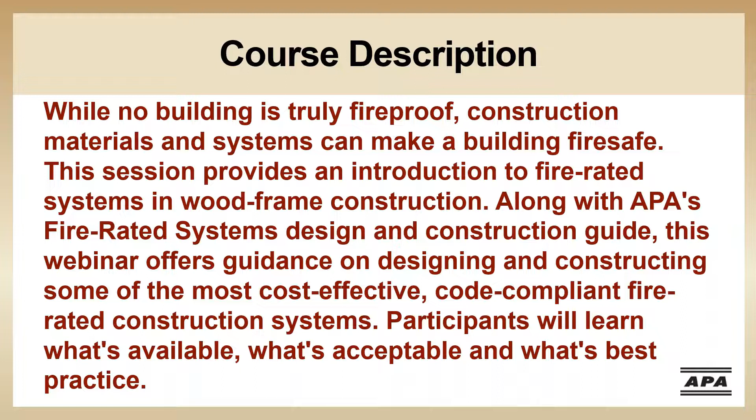All right, let's get started. On the screen you'll see a copy of the description you were provided upon registration. During this course, we'll talk about different assemblies found in APA's Fire-Rated System Design and Construction Guide. This webinar will be a guide on designing and constructing cost-effective and code-compliant fire-rated systems.

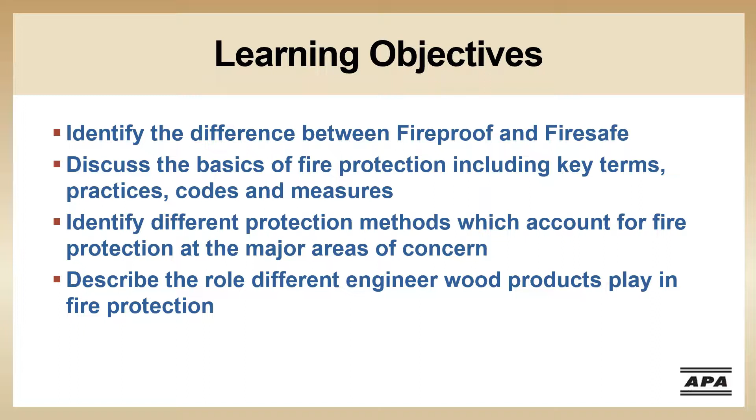This is a list of the learning objectives we're going to cover during this course. We'll identify the difference between fireproof and firesafe. We'll look at key terms related to basic fire protection, identify applicable codes, and recognize the tests by which these systems are measured by testing agencies. We'll review different building systems that create the required fire protection and describe engineered wood products used today to meet fire requirements in various buildings.

Today's program is for the construction professional who's interested in finding the balance between cost, code, form, and function. Our agenda will follow the learning objectives listed in the previous slide.

First, fireproof versus firesafe, along with the codes and terms associated with fire protection. We'll discuss different areas of buildings and how we protect them with these assemblies. We'll talk about considerations when using different engineered wood products.

No matter where we live, forests play an important role in our lives. Healthy forests reduce greenhouse gases in the atmosphere by absorbing carbon dioxide from the air, thus combating climate change. Plus, wood's natural properties combined with highly efficient wood frame construction systems make it a top choice for builders and those looking at energy conservation.

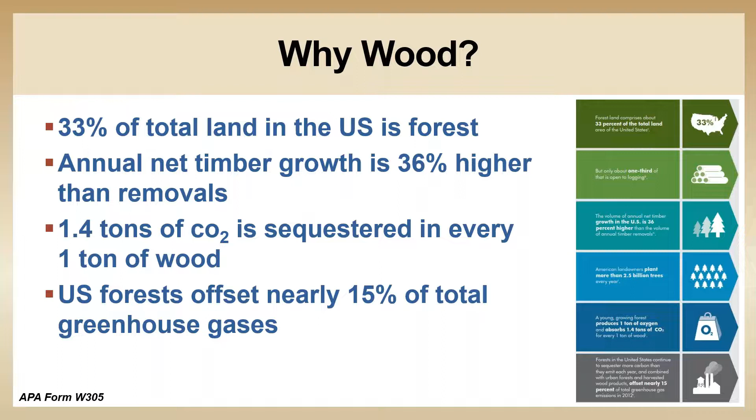Now, here are a few terms that may be new to you. The first one is the critical point at which human life is untenable. The Forest Products Laboratory has done numerous studies on dwelling room fires involving combustible contents. It was concluded that wall and ceiling materials, whether combustible or non-combustible, have little to no effect on the time or temperature to reach this critical point.

Flame spread is the spread of fire within a room and is measured by the performance of the materials used for the interior finish on walls, ceilings, and partitions. This is a property of the surface material once a fire has started.

Fire resistance is the measure of the containment of the fire within a room or building. It is defined as protection against fire penetration through a wall, floor, or roof, either directly or through a high rate of heat transfer.

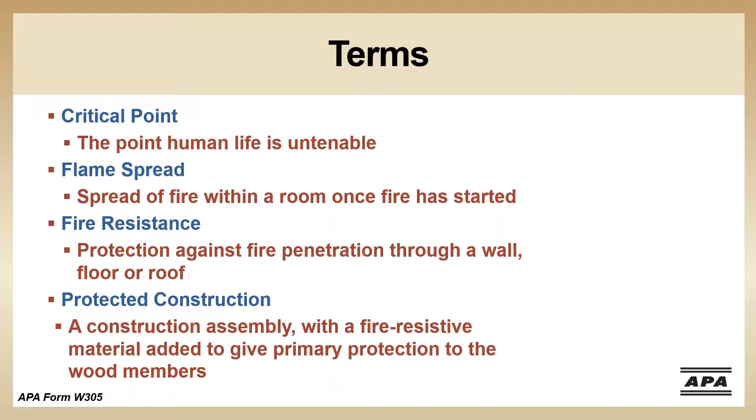Protected construction is any wood assembly, such as a floor, ceiling, or wall, with a fire-resistant material added to provide primary protection for the wood members. This material may be gypsum wallboard, plaster, or acoustical tile. This covering prevents flame passage and temperature rise while reinforcing framing against collapse.

We'll begin with fireproof versus firesafe after having seen the key terms and understanding the important role engineered wood products can provide in many buildings.

The first step is recognizing that no buildings are designed nor built that are fireproof. This just does not exist. The photo here is from a 1953 fire at the General Motors plant in Livonia, Michigan. The open building design was greater than 34 acres in size and 866 feet wide. This plant was considered completely non-combustible, yet was a total loss due to the collapse of the unprotected metal construction.

This fire led to the development of the 204 standard by the National Fire Protection Association. This is still considered one of the worst automotive plant fires in history.

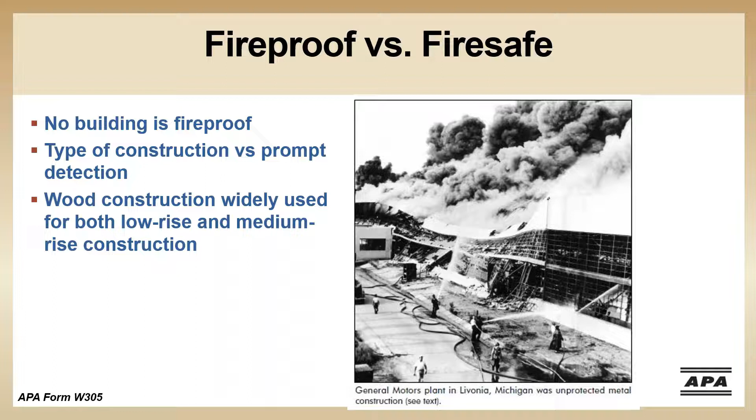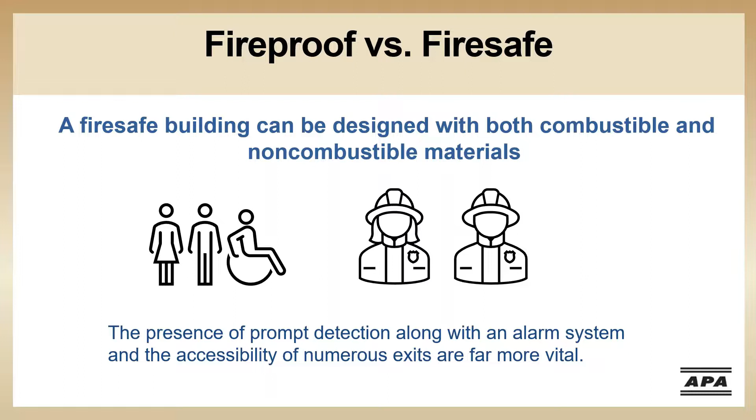Although the type of construction is important, first we have to protect the occupants and firefighters. The presence of prompt detection along with an alarm system and the accessibility of numerous exits are far more vital. With proper construction in conformance with code regulations and recognition of the protection factors, a fire-safe building can be designed with both combustible and non-combustible materials. Wood and wood structural panel systems have been widely used for both low-rise and medium-rise construction.

Next, we'll look at the different codes and testing when talking about fire protection.

In order to evaluate fire safety of a structure, building authorities may consider many factors, including flame spread and fire resistance rating. The best known flame spread test is the tunnel test, ASTM E84 or UL 723. In Canada, they have a similar test with ULC S102.

This test takes a sample of material 20 inches by 24 feet, installed as a ceiling of a test chamber and exposed to a gas flame at one end. The rate at which the flame spreads across the sample is compared on a scale. The scale starts at 0 for inorganic reinforced cement board and goes up to 100 for red oak. Additionally, this test will measure the opacity of smoke generated by the burning material.

Table 1 in the Fire Rated System Guide summarizes the International Building Code's interior finish classifications. Materials are broken into 3 classes, limited by the area of use and based on the severity of the fire hazard.

Class A materials are permitted for areas where fire hazards are most severe, such as exits in unsprinklered buildings. Class B are permitted in areas of intermittent severity, such as corridors providing egress, and Class C would be other areas. APA trademark panels such as plywood and OSB fall generally in Class B or C. If the panels are fire retardant treated, they can be used in Class A unless prohibited by the code.

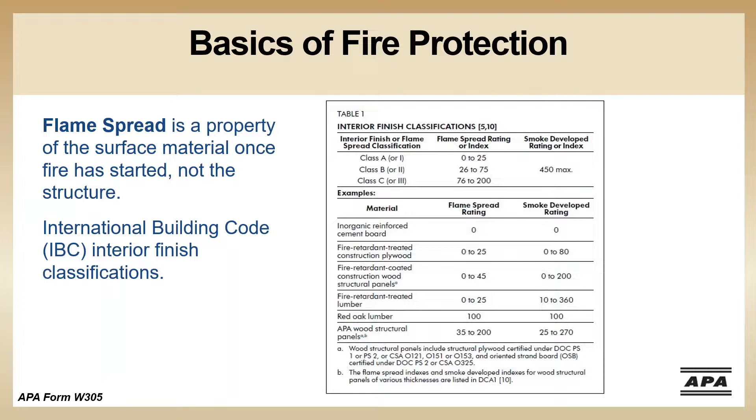APA's technical topic: Flame Spread Index. The performance rated wood structural panel publication displays test results based on ASTM E84 or UL 723, showing flame spread indexes for the wood structural panel.

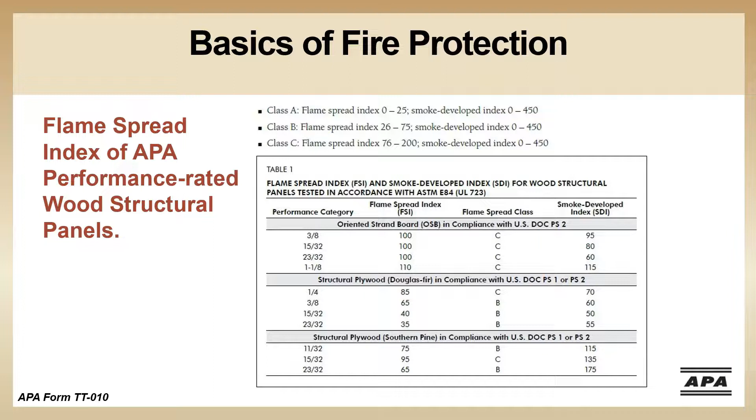These include plywood, structural plywood conforming to Product Standard 1, or for wood structural panels and OSB conforming to Product Standard 2. These tests again were performed in accordance with ASTM E84.

Table 2 shows flame spread requirements for interior finish as called for under the IBC for both sprinklered and unsprinklered buildings.

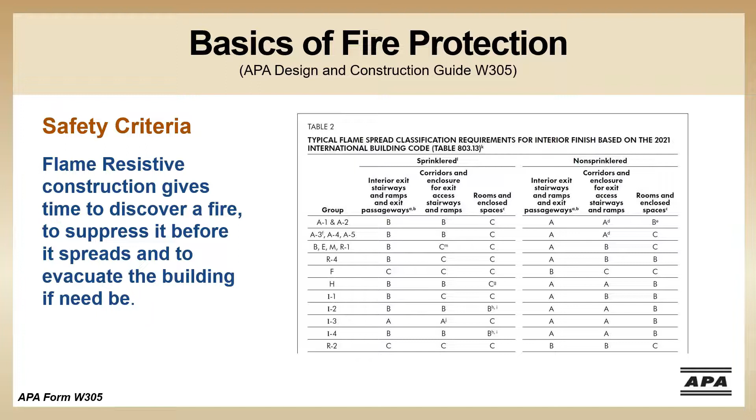In many cases, ordinary wood frame construction with wood structural panel sheathing provides ample fire safety and is completely acceptable. When unusual circumstances require additional protection, the designer's options include protected construction, mass timber construction, or heavy timber construction. Under each building type, Type A requires a higher fire rating that allows for larger structures.

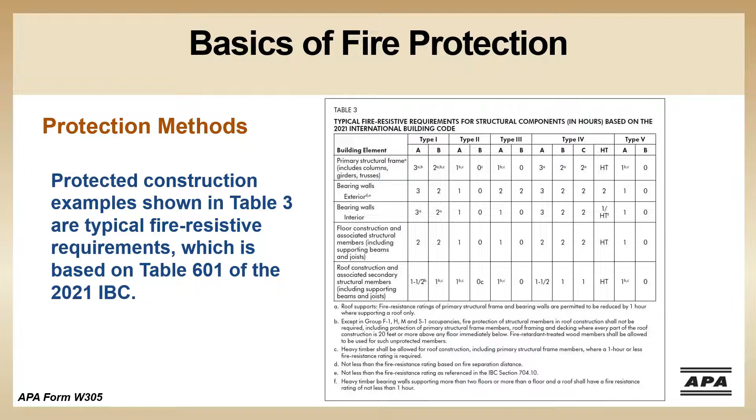How do we know how to build these rated assemblies? It can be done by calculation using Section 722 of the International Building Code, or by tested assemblies. When testing an assembly, it's simply constructed and tested in accordance with ASTM E119, and the rating is determined by the duration of the test.

The test is performed using a standard time temperature curve shown on the left here. This allows for a standardized test over a variety of products and construction methods. I should point out that the time temperature curve shown does represent a very aggressive fire. Real-world fire curves will vary depending on the fuel load and other factors, but this curve serves the purpose of standardizing the test.

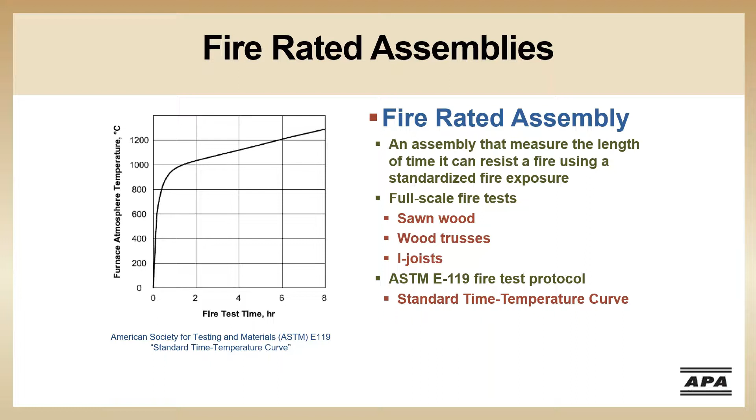The table shown here shows allowable stories from the 2021 IBC Table 504.4. We've selected to show only the residential aspect, which applies to all building types. Today, we'll be focusing on the fire protection methods used most in Type 3 and Type 5 structures.

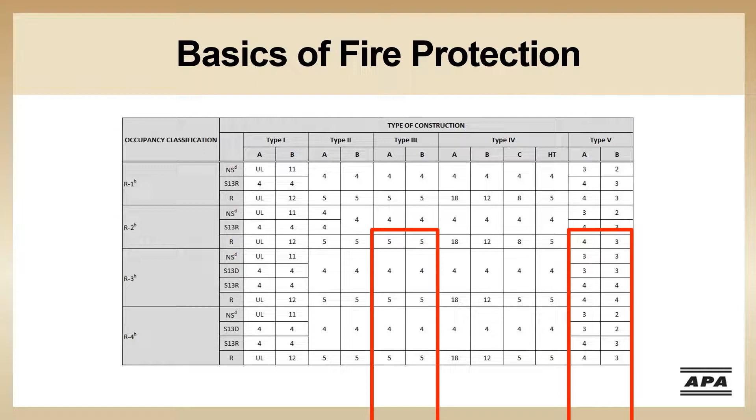Some of the more popular protection methods are listed on this slide, and we'll talk about mass timber construction, heavy timber construction, fire retardant treated wood, fire retardant paints, sprinklers, and then we'll go into some detail on the fire rated assemblies themselves.

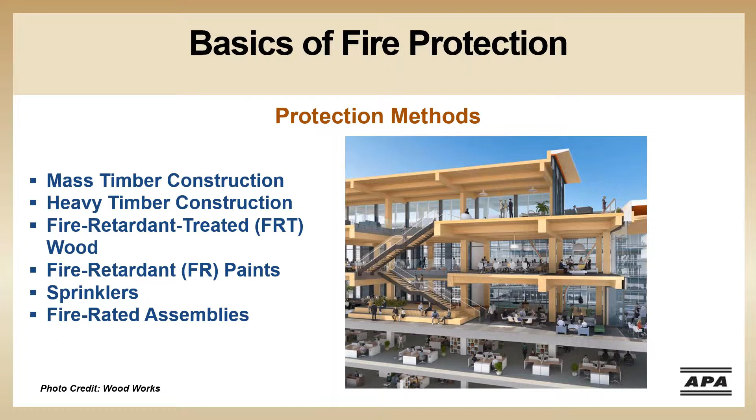Mass timber construction provides fire protection by using mass timber, which is defined in IBC by structural elements in Type 4 construction, primarily of solid, panelized, or engineered wood products that meet minimum cross-section dimensions of Type 4 construction.

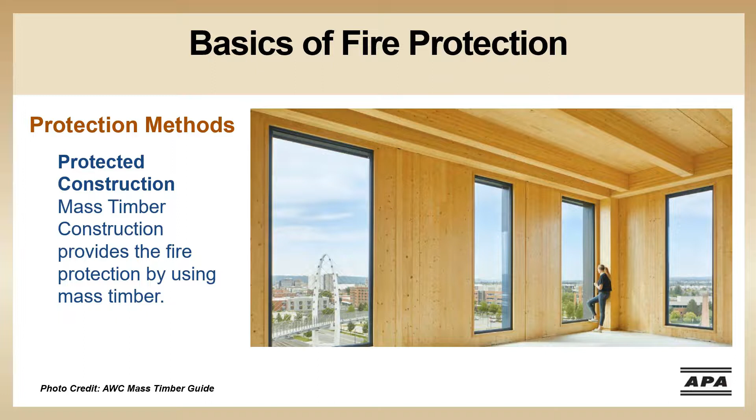Cross-laminated timber, or CLT, in compliance with ANSI APA PRG 320, is required for Types 4, 4A, 4B, and 4C construction, provided that the fire resistance rating of the mass timber meets the fire resistance rating requirements of the IBC, based on either the fire resistance rating of the non-combustible protection, the mass timber, or a combination of both. Section 602.4 through Section 602.4.3 of the 2021 IBC should be referenced for more details.

The IBC places limitations on the height and area of buildings according to its compliance with certain established criteria, which are based on codes concerned with the health and safety of occupants. Because light frame construction is usually the best choice from the standpoint of cost and simplicity, yet it is accorded the lowest basic allowable areas, it is to the designer's advantage to find ways to secure area increases to take advantage of the economic and versatility of wood construction.

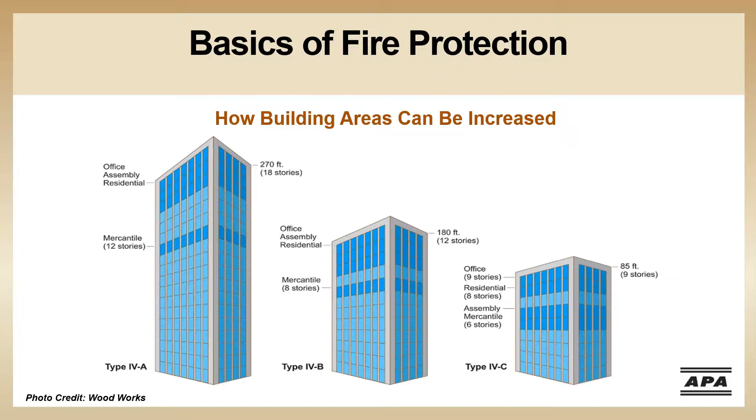Type 4 buildings have been approved for up to 18 stories using mass timber. More detail than we're going to go into about mass timber today can be accessed through WoodWorks.

The use of mass timber for taller buildings has been used in Europe and Canada for some time now, and the intersection of lower embodied energy and renewable resources propels the mass timber industry forward. As noted, timber buildings store carbon in the structure for the entire life of the building. Mass timber, for example, has a negative carbon footprint equaling 2,300 cars being taken off the road per year.

This is per the contractor on this Ascent building. The contractor also spoke about the benefits, saying mass timber materials are not inexpensive. However, mass timber offers several cost competitive advantages and long-term benefits.

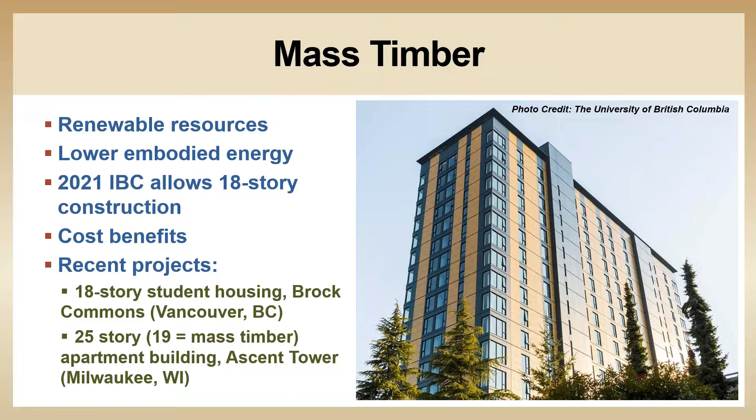Columns, beams, and panels on average weigh one-fifth the weight of concrete and steel, thus reducing shipping costs and requiring a smaller workforce to install. With prefabricated panels delivered directly to the job site, construction time can be reduced by approximately 25%, saving owners even more time and money. Furthermore, wood structures have a biophilic effect on people, increasing occupants' overall health and wellness, and give long-term value to the design.

Heavy timber construction implies protection provided by the mass wood members. The name comes from early New England textile mills, where it is known as mill construction, planking timber, or slow burning. This construction method means that while the outside may char during a fire, the surface char acts as insulation, while the strength of the wood is such that it continues to support the load, so the chance of building collapse is greatly diminished.

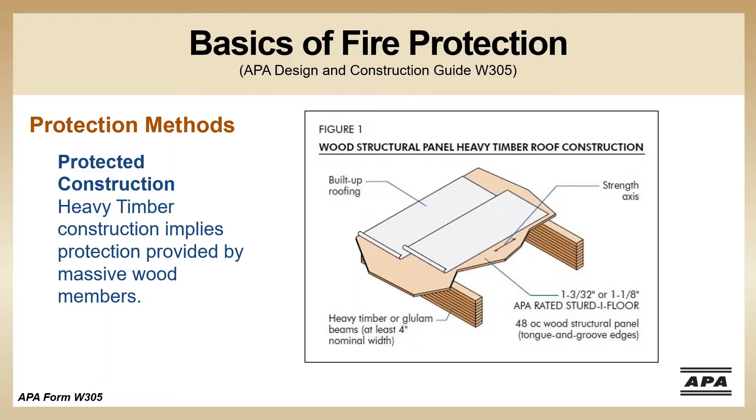The minimum dimension required by the code for heavy timber is found in Table 2304.11 of the 2021 IBC, shown in this publication in Table 4. Per the 2021 IBC Section 803.3, there's a heavy timber exemption which states that exposed portions of building elements complying with the requirements for buildings of heavy timber construction in Section 602.4 or Section 2304.11 shall not be subject to interior finish requirements, except in interior exit stairways, interior exit ramps, or exit passageways.

Here's a portion of the aforementioned Table 4 showing minimum sizes for mass timber products such as solid sawn lumber, glue laminated timber, cross laminated timber, or structural composite lumber.

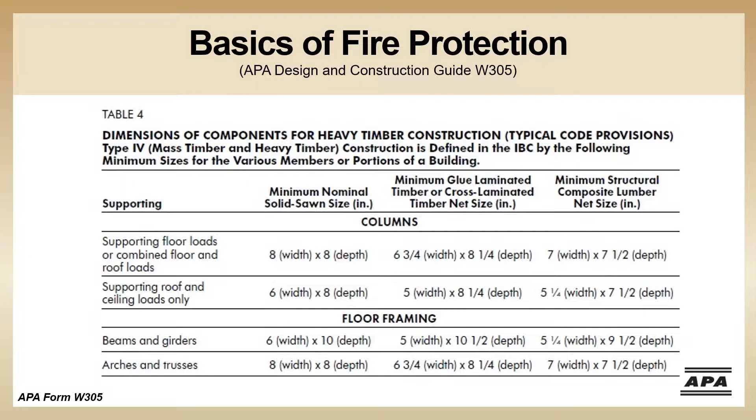Now, glue lam beams need a special mention due to their versatility and popularity. We've moved glue lam up in this presentation from where it is in the fire rated systems because glue lam has a reputation for being used in striking applications such as vaulted ceilings and other designs with soaring open spaces. The glue lam has a classic natural wood appearance that holds a timeless appeal, which makes it a part of any biophilic design.

Aesthetics aside, there are many applications where the strength and durability of glue lam beams make them an ideal structural choice. A glue lam with a minimum width of 5 1/8 inch can be adapted for a 1-hour fire rating in accordance with procedures by the IBC Table 5. This details the minimum depth required for the beam to meet a 1-hour rating based on the width.

Glue lams with minimum widths of 6 3/4 and 8 3/4 can be adapted for 100% of the design load. Tension laminations of the glue lam beams are always positioned as the outermost laminations of the beam, subjected to the maximum tension stresses in a fire.

The outermost fibers of the wood are the first to be damaged. For this reason, when a rating is required for a glue lam beam, the specifier should note that additional tension laminations should be used in place of core laminations, and it should be marked on the glue lam beam as rated for 1 hour or rated for 2 hour. You can reference APA's Calculating Fire Resistance of Glue Lam Beams and Columns for more information.

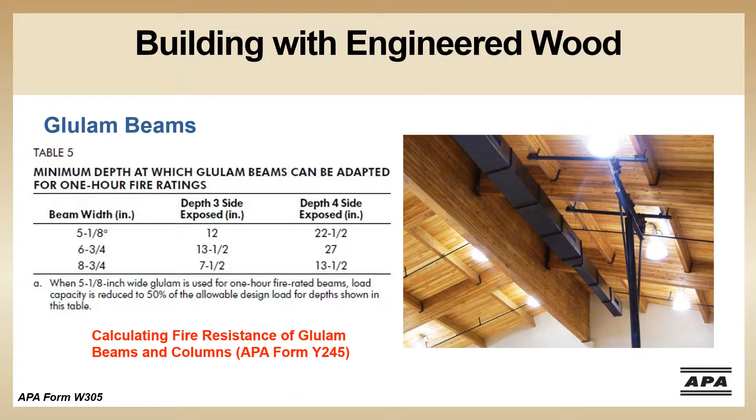The structural member's fire resistance is measured by the time it can support its design load during a fire. An exposed beam or column sized for a minimum 1-hour fire resistance will support its full design load for at least 1 hour during standard fire test conditions which simulate an actual fire.

Like mass and heavy timbers, the charring of a glue lam surface during a fire places a premium on the cross-sectional area. Charring weakens the glue lam's cross-sectional area slowly because of the self-insulating character of the char.

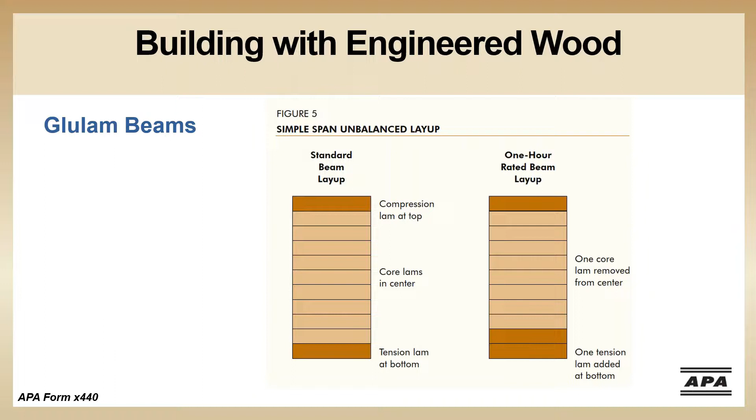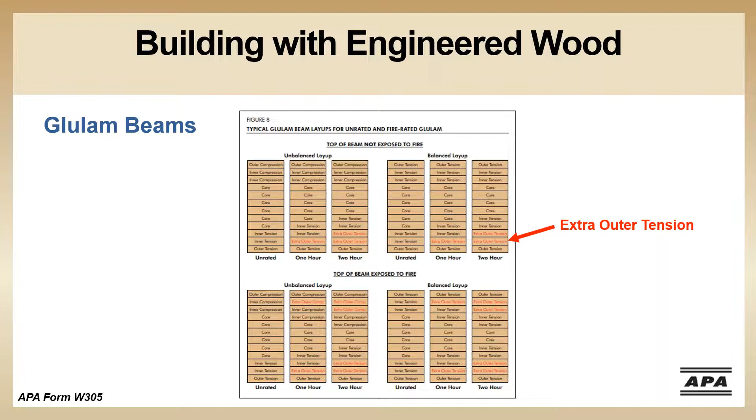Here you'll see different laminations based on the fire rating that is required. Note the laminations in red. The fire rating, fire exposure, and balancing of the beam will determine the location and number of additional laminations. The upper laminations shown have the top of the beam not exposed to fire, and the layups shown below have the upper and lower sides exposed to fire, where additional outer members will be added to both the top and bottom of the beam.

FRT wood is pressure impregnated with chemicals or a water solution, or by other means during manufacture, to inhibit combustion. This qualifies it for lower flame spread or smoke generation ratings, and reduces its fire hazard classification when identified as such by a code-recognized testing agency label. It is recognized on parity with non-combustible construction by many insurance rating bureaus, but not by the building codes.

The span ratings and load capabilities for APA trademark plywood are based on untreated panels and may not apply following fire retardant treatment. You should obtain structural performance characteristics and use recommendations for the FRT plywood from the company providing the treatment and redrying service.

I'd also like to point out that products treated with a non-pressure impregnated process do not qualify as fire retardant treated wood, as Section 2303.2 of the IBC also requires that an ASTM E84 or UL 723 test shall be continued for 20 additional minutes, and the fire shall not progress more than 10.5 feet.

Fire retardant paints can be used on plywood for non-structural interior finish applications to reduce flame spread ratings, depending on the paint selected. These paints are tested per ASTM E84 or UL 723 for 10 minutes, as compared to the 30 minutes for FRT plywood. The FRT plywood does require an additional 20 minutes of testing to comply with the American Wood Protection Association standard U1.

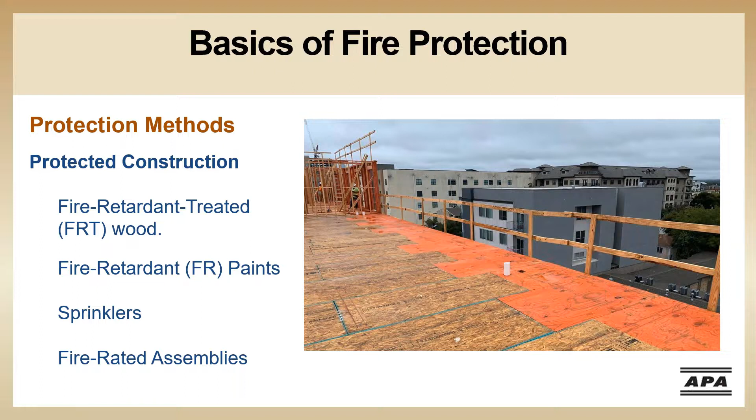All buildings must be code compliant to maximum permissible heights and floor areas. These specifications are based on certain characteristics of the buildings, including fire zone, the type of occupancy, construction and material systems, the setbacks from property lines, exits, and automatic extinguishing systems.

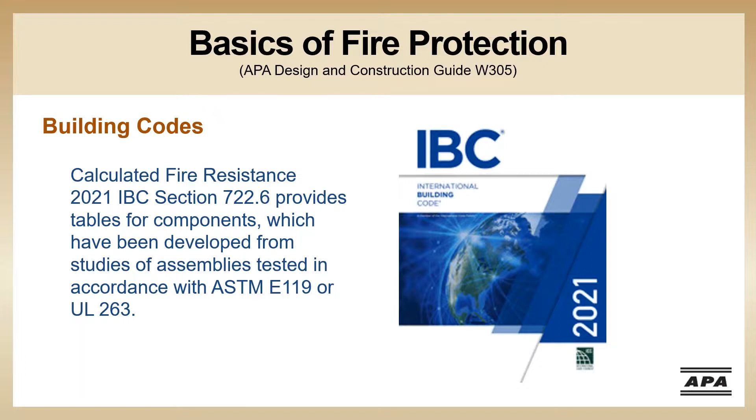The IBC permits determination of 1 hour fire rated wood frame floors, roofs, and load bearing and non-load bearing walls by calculation. As an alternate to assemblies, a 1 hour fire rated assembly can be determined by combining the individual component times of the assembly in accordance with the method and limitations in the code, thereby providing additional choices for the designer.

Now we'll look at some examples of how we can protect the different areas of a building. Many of these assemblies are going to look similar, but there are subtle differences that need to be followed, and how you select an assembly for your project will likely be based on cost and needs.

Figure 2A shows a 1 hour combustible wall assembly exposed to fire on both faces that has code approved APA rated siding or other approved exterior finish over a minimum 5/8 type X gypsum wallboard sheathing on the exterior side, with 5/8 type X gypsum wallboard on the interior face. Minimum 2x4 studs are required, can be spaced at 16 or 24 inches on center, and mineral wool or fiberglass batt insulation is used for the wall cavity space.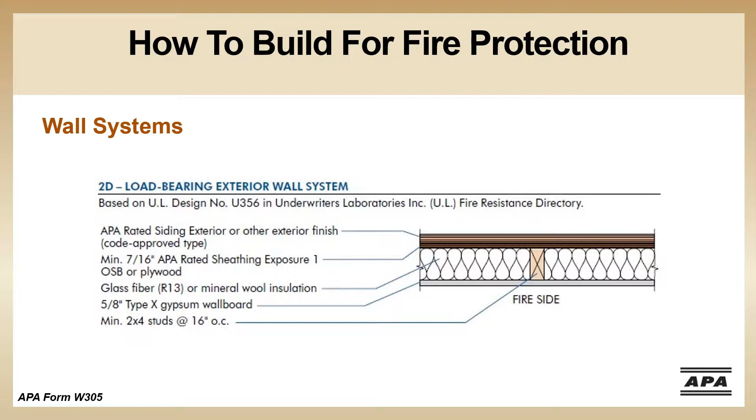Panels can be installed with the long dimension of the panel parallel or perpendicular to the studs. The vertical joints should be centered on the studs. Horizontal joints need to be backed with nominal 2x4 blocking. A change in these details may affect the fire resistance of the assembly.

A hidden advantage when using wood structural panels in these exterior wall assemblies is being able to use these products as a nail base sheathing. Continuous plywood or OSB sheathing is a secure, code-compliant nail base that provides an easy and effective solution for attaching all claddings. We're going to look at some of the advantages that plywood or OSB wood structural panels provide when they're used as a nail base.

Stud spacing of 24 inches on center can be maintained with cladding materials that require less than 24 inches on center. Shorter fasteners can also be used because they don't have to be embedded into the framing members. Properly installed wood structural panels provide lateral stability, allowing the structure to resist high winds. And lightweight siding materials can be attached directly to the wood structural panels, providing a structural nail base.

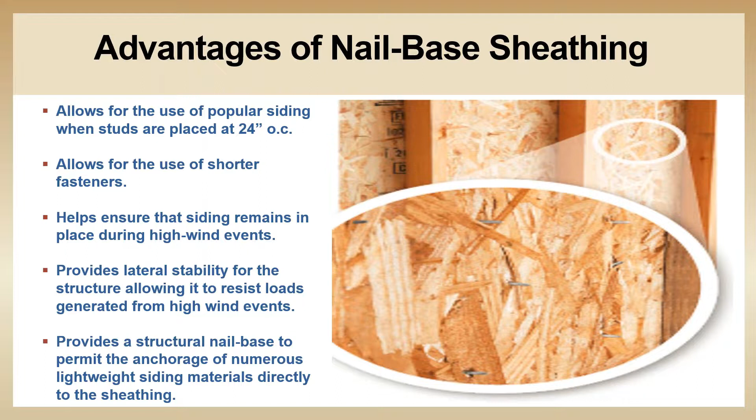Many floor ceiling or roof ceiling systems are listed in the UL Fire Resistance Directory and are accepted as rated constructions by the building codes. Examples shown in figures 4.1, 4.2, and 4.3 are using solid sawn lumber joists. When looking at the next few slides, you'll see similarities. We just want to point out that depending on your need, wood frame construction will allow for the most flexibility.

All the floor ceiling and roof ceiling assemblies detailed in the fire rated design guide require the face layer finish joints to be covered with tape and coated with a joint compound. Screw heads must also be covered with a joint compound. Other subfloor options for this example are listed in the design guide.

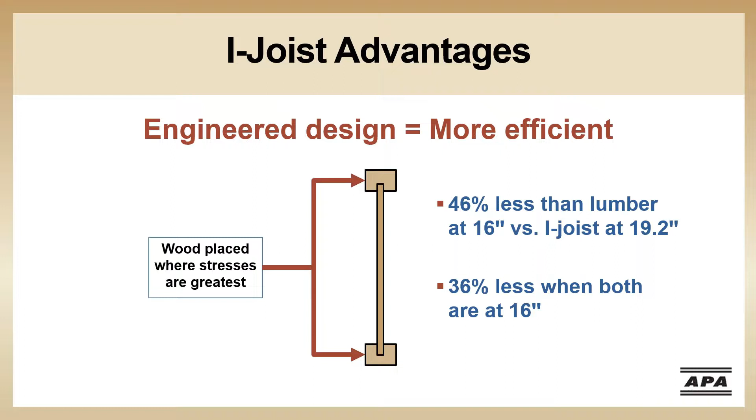These lighter weight joists also come in longer lengths, so that handling is easier, with the possibility of running a single I-joist from the front wall to the rear wall of a building.

I-joists are typically manufactured in 4 common depths: 9.5, 11 7/8, 14 inch, and 16 inch. Some manufacturers may also produce other depths. All APA I-joists meet PRI 400, the performance standard, at a minimum. Many I-joist manufacturers make products that exceed the minimum PRI 400 and have their own product reports issued through either APA or ICC.

As we move through these figures 5.1 through 5.9, varying flange width and flange areas will be mentioned for the different fire rated systems shown and should be accounted for during design and construction phases.

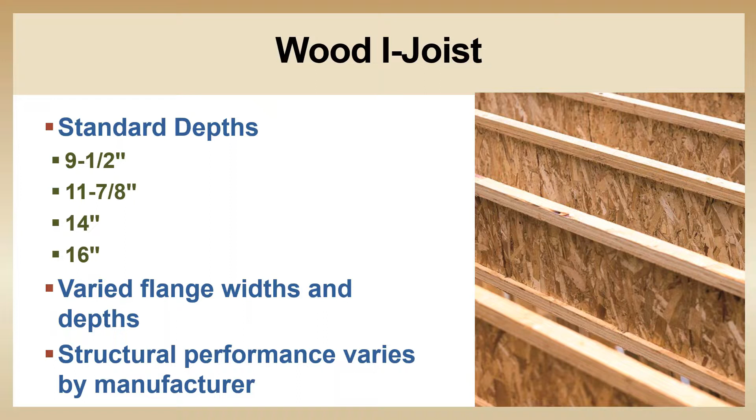Figure 5.1 states that furring channels are installed perpendicular to the joist with 5/8 inch single layer Type C gypsum wallboard installed parallel to the joist. The minimum I-joist size here is 9¼ inches with a maximum spacing of 24 inches on center for figures 5.1 through 5.9. It should be noted the flange thickness and the required flange areas do vary in the next few slides.

The minimum flange thickness shown here is 1.5 inches, and the flange area is at least 5¼ inches, with a minimum web thickness of 3/8 of an inch.

A minimum 1 1/2 inch mineral wool insulation batts are installed adjacent to the bottom flange of the I-joist and supported by the furring channels. Ends of the batts shall be centered over the furring channels.

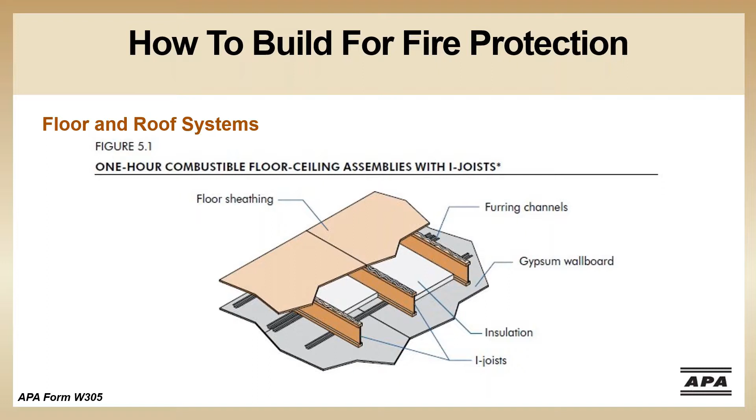The floor ceiling assembly requires 23/32 tongue and groove wood structural panels to be installed with a construction adhesive applied to the top of a joist prior to the floor panels being installed.

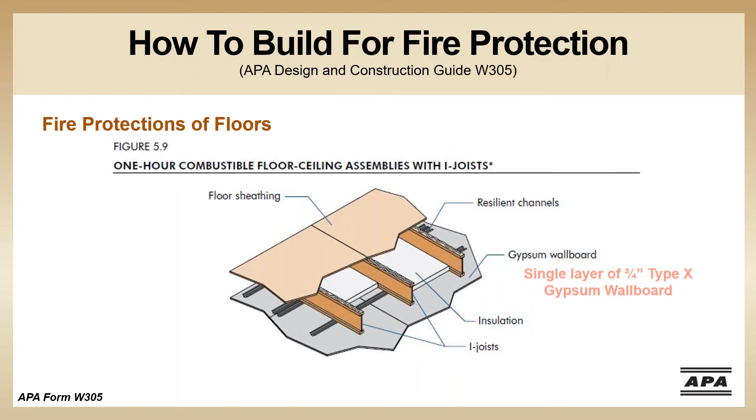Figure 5.9 details a single layer of 3/4 inch Type X gypsum wallboard with a minimum weight of 3 pounds per square foot in compliance with ASTM 1396, attached with 1/2 millimeter galvanized resilient channels, which are attached perpendicular to the bottom flange of the I-joist with 1 1/4 inch Type W drywall screws.

Channels are spaced a minimum of 16 inches on center. They are doubled at each wallboard end joint and extend to the next joist beyond each joint.

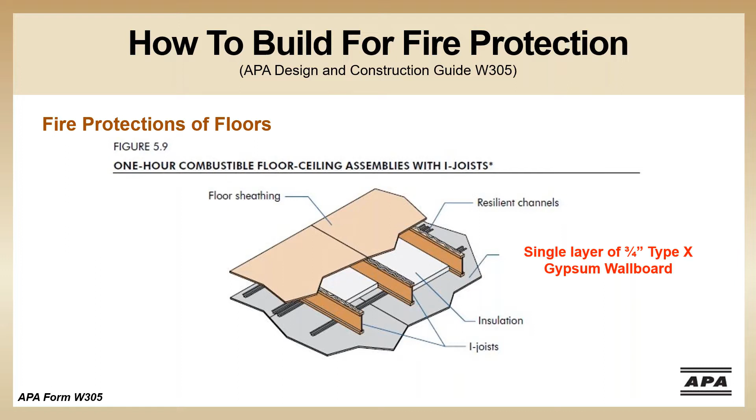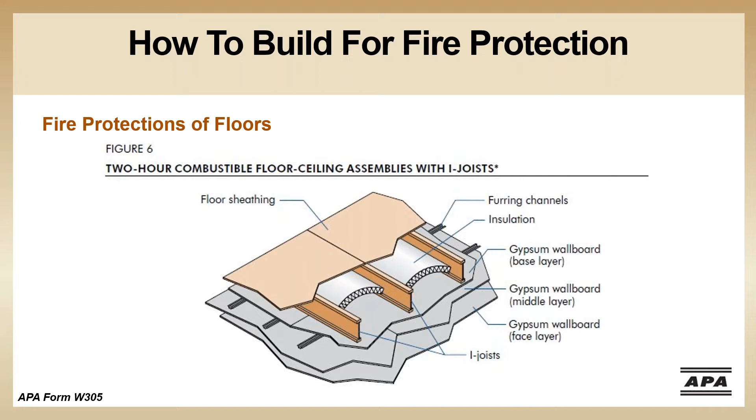APA's data file, Rim Board and Fire Rated Assemblies, is another publication where detailed information can be found on fire rated assemblies. The Fire Rated Assemblies Design Guide details one of the 6 fire rated rim board assemblies shown in the data file. We're going to review all the ones listed in the rim board data file.

We'll also see the end wall assemblies shown, the I-joist floor systems installed perpendicular to the rim board, as we see on the left, or installed parallel to the rim board, as we see on the right.

The 5/8 Type X gypsum or regular 5/8 gypsum wallboard shown in the ceiling is to protect the rim board only. It does not necessarily cause the floor assembly to be rated.

APA performance rated rim boards are manufactured and tested under the requirements of ANSI APA PRR 410 or 401. The barrier of continuous rim board on the wall and parallel with the floor joist, or as continuous on the wall along the top of the wall and perpendicular to the I-joist, will meet these requirements.

Because the flammability and ignitability of the adhesive used in the rim board is less than that of the wood, the adhesive does not melt prior to ignition. The wood itself determines the flammability of the rim board. These examples show a single wall configuration with rim board thickness variations detailed and gypsum wall requirements with accompanying tables.

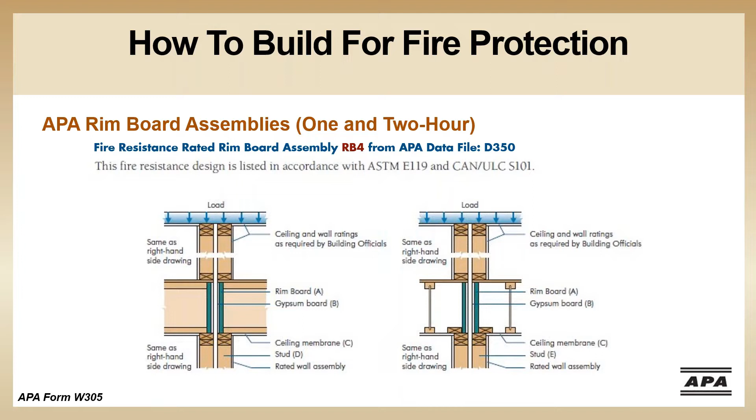Here's an example from the rim board data file, a double wall assembly which transfers the load to the base assembly with the APA rim board. The gypsum wallboard details listed in the accompanying data files show different systems to achieve 1 hour and 2 hour fire ratings for the ceiling membranes.

And here's one of those accompanying tables from the data file which shows different rim board thicknesses and protection required for each assembly in the double wall configuration with load transfer to the base assembly. This table lists the rim board thickness in the left-hand column, the rim board protection in the next column, ceiling membrane requirements for 1 and 2 hour ratings along with minimum stud sizes.

If no ceiling membrane protection for the 1 hour rating is provided for the rim board, it shall be protected as stated in the double wall configuration table shown here. When there's a ceiling membrane protection, the rim board does not need protection.

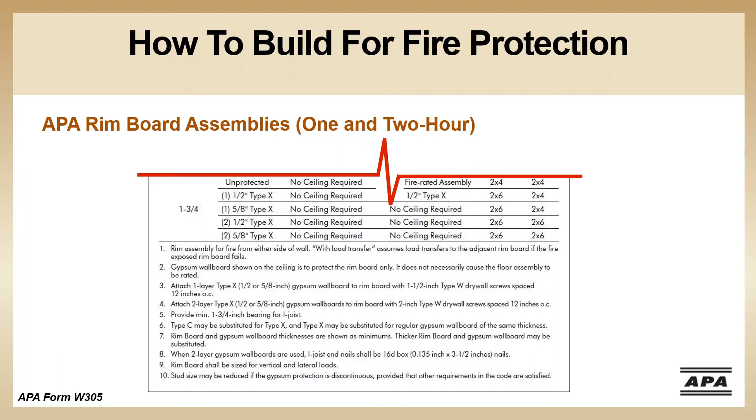Footnote 1 states the rim assembly will transfer the load from either side if the adjacent rim board is exposed to fire and fails. Footnote 6 allows type C wall board to be substituted for type X or regular gypsum wall boards. We should also note APA performance rated rim boards can be manufactured using plywood, oriented strand board, glue laminated timber, or structural composite lumber, composed of laminated veneer lumber or oriented strand lumber.

Each fire resistance rated rim board assembly in the data file has an accompanying table we just looked at. Here, RB5 is an example of double walls with no load transfer to the base assembly. The last example in this data file shows another double wall assembly with gypsum wall board located between the APA rim boards on each wall.

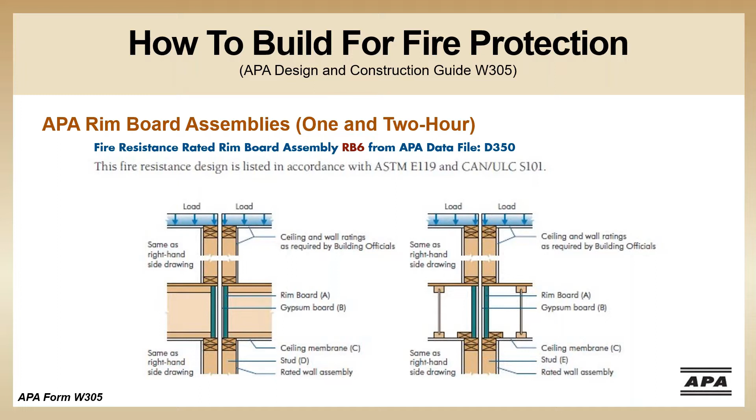We've looked at different assemblies for floor ceilings, roof ceilings, and rim boards. So how can these be incorporated into your designs? The IBC allows wood frame building areas to be increased when 1 hour fire resistance is provided for all structural elements in the building, including beams, columns, floors, walls, and roofs. Another provision allowing building areas to be increased is when an automatic sprinkler system is installed throughout the building.

Under the IBC, a 300% increase is permitted for one-story buildings, and 200% for multi-story buildings. An additional benefit is the likelihood of substantially lower insurance rates with sprinklers. Sprinkler systems can also be connected to a central alarm system for additional protection.

Building area increases are allowed if there are large open areas on 2 or more sides of a building. A 75% increase is allowed if all sides face towards public streets. Next is unlimited area: the IBC provides for construction of unlimited areas for industrial storage or business uses. Generally, there must be large areas of open space surrounding the building, and the building must be completely sprinklered.

Finally, firewalls. The equivalent effect of area increases can be achieved by introducing properly constructed firewalls. In effect, 2 contiguous buildings are erected when they are separated by a firewall or partition with all openings protected.

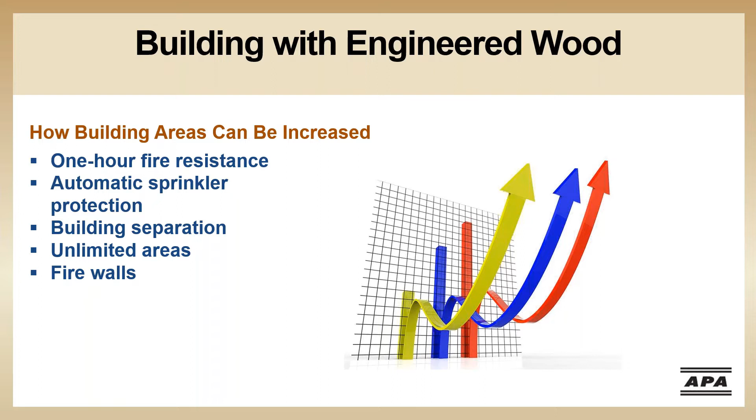That brings us back to our agenda. We've learned that there's no such thing as fireproof. We discussed the codes and terms important when learning about fire protection. We looked at how to address different building areas and special considerations when using engineered wood products, then moved to considerations when designing for wood construction. We've covered many details in several fire-rated assemblies. In reviewing the building size or determining space needed, many engineered wood products discussed today can help meet those needs and potentially lead to cost savings.

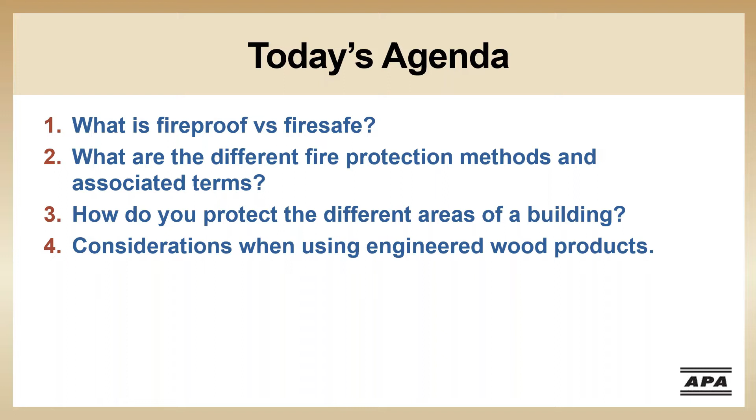This concludes our presentation. I'll now turn the mic back over to Bob and see if we've received any questions.